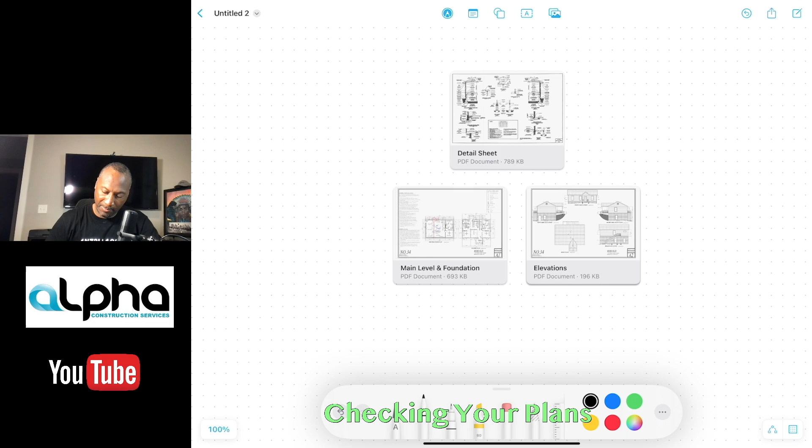So this is the set of plans right here, guys. You don't get no simpler than this. I tell you what, man, you can't ask for a better set of plans, guys. You can't get no better than this.

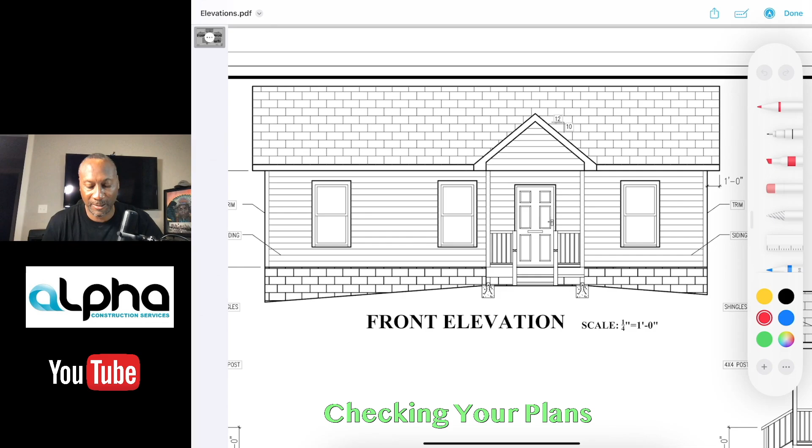So you can see, if I look right here, this is a gable roof. It's easy to calculate the lumber package on it. Guys, the house is just a box. You see the roof right here, it's just a box.

And you can look at this right here, man, and say, how can we mess this up? This is just too basic and too simple to mess up. Okay, so this is what we got.

So let me go to this. This is what I want you guys to focus on right here. So this right here is the details.

Now, unfortunately, in this set of plans, I think what the plan designer should have done was he got a bunch of details that he kind of put all together so that when he does different sets of plans, he doesn't have to keep changing them out. He just hits one type of detail. I think what he should have done was only put the details applicable to that particular house, to that one house. That's what should have been done.

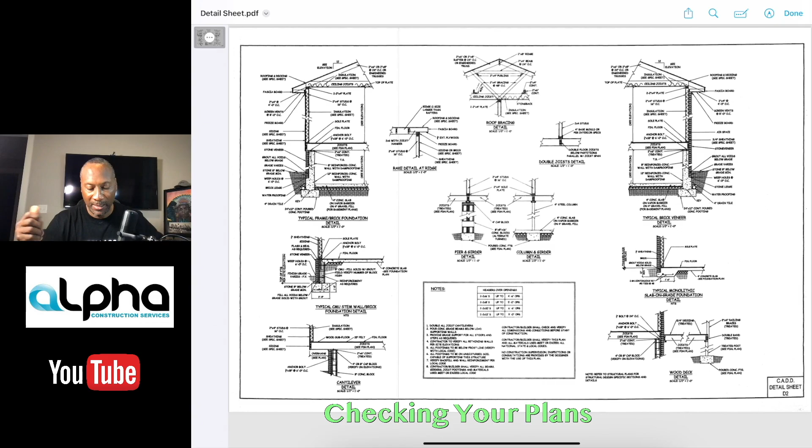But now we're going to look at the roof details. So this is what we want to look at right here, guys. Now, if you notice the whole purpose of this, let me see if I can show you, this beam right here that you see right here.

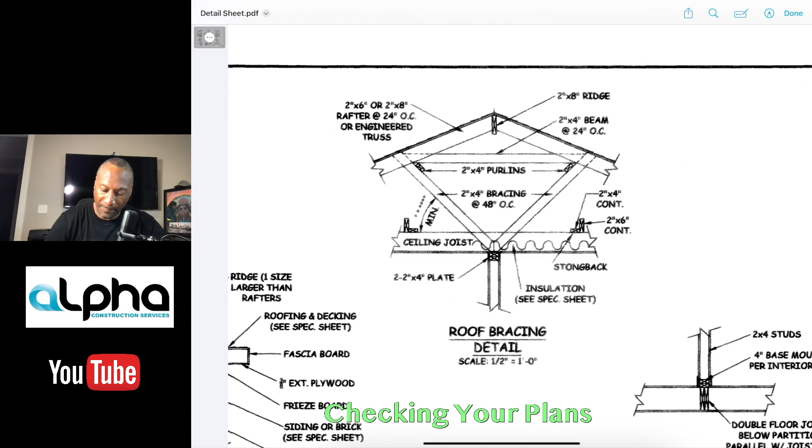Oh man, I knew that would happen. Let me just, all right, it's going to take a minute for me to get this right. Let me put this over here. So let's switch it over.

Let me just say, this beam right here is what you call a brace, guys. These are braces, okay? So this keeps these rafters - we got these rafters here, one here, one here. This keeps those rafters from doing what they call, it braces it right here to keep those rafters from dipping, because the gravity is pushing down.

So you have what they call, when this right here is called deflection, by the way, guys. When gravity pulls down on it, it keeps it from deflecting, because those rafters are kind of long. And so the longer they are, you have to break that span. This is what you call a span. So you got to break that span up with these guys right here, with these braces right here.

So these braces, these 2x4 braces, and really they should be called strong backs, guys. This right here should actually be called a strong back. This should be a strong back. And...

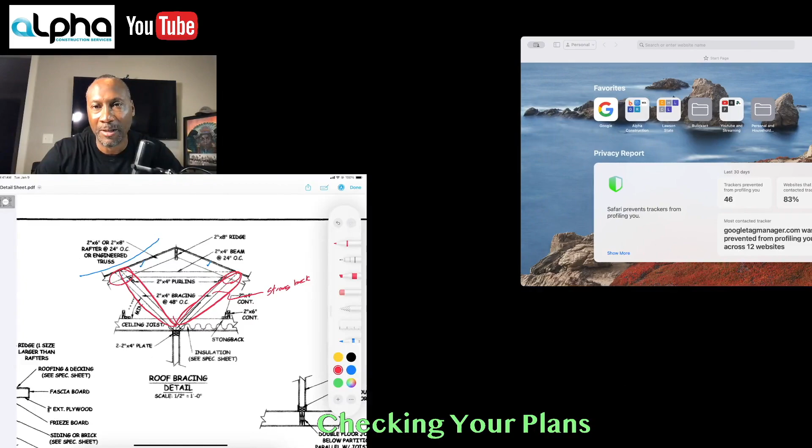I'll show you what a strong back is. Well, let me just see if I'm gonna try to bump from screen to screen. I'm just seeing how to do it right quick. Like, all right, there we go. We may be able to do this thing right here. So strong back.

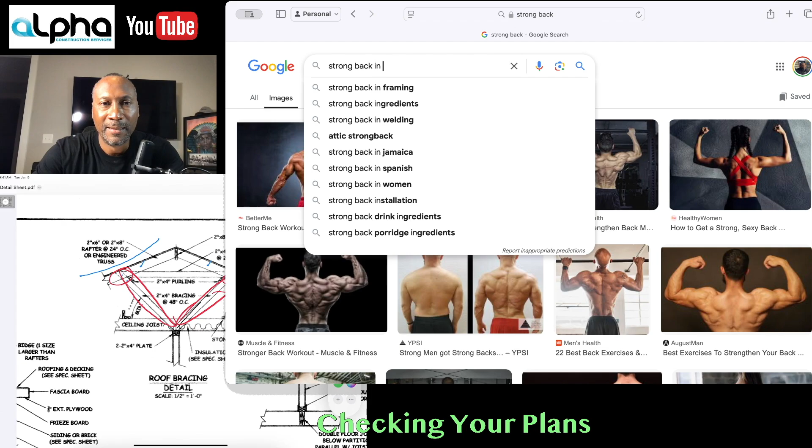Let's see if I can pull one up. Look at that. Pull up the... strong back. Let's see, in construction, let's see what happens now. There we go, right there. Let's see if I can find one so y'all can see what I'm talking about. This is an example of a strong back right here.

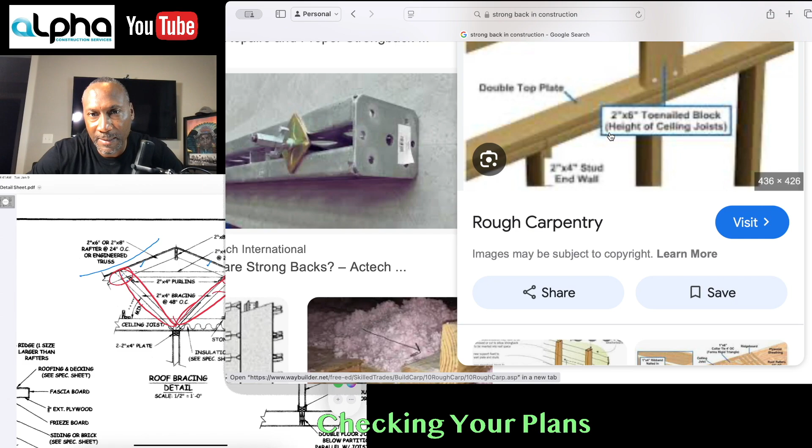If I can kind of show you this picture right here, guy, oh man. You know, right here, guys, if you see this picture, you got a 2x4 going this way, and you got that 2x4 nailed to another 2x4 going the other way, and it keeps that 2x4 from twisting and bending, right? So let's see if I can get that. All right, there we go.

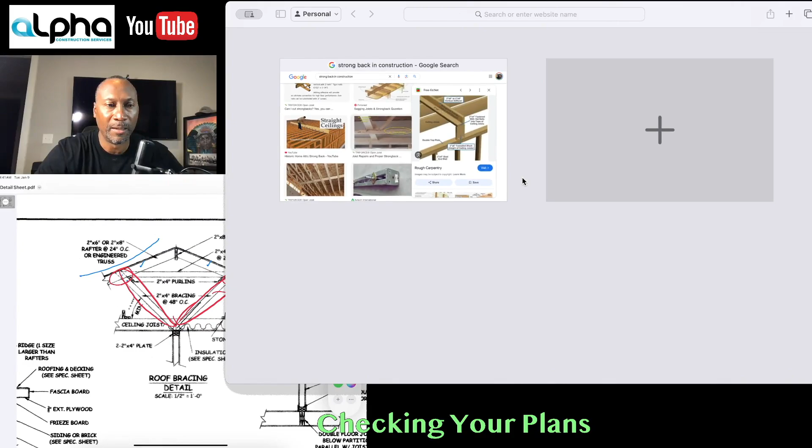All right, so let me go back to my other screen. So that's what should be put, guys. These right here things should be strong backs. They should be strong backs, and you should put some strong backs right here too, right there as well.

Does that make sense, guys? So I'm gonna erase all this right here because it can get kind of convoluted. So this is what we got, guys.

But now what I want you guys to really focus on is this roof load right here. It goes down, this roof load, and it has to be supported by this beam right here. That load right here, guys, goes all the way to the ground, or it hits the LVL beam or something, and it gets bent around and goes around all the way to the footings.

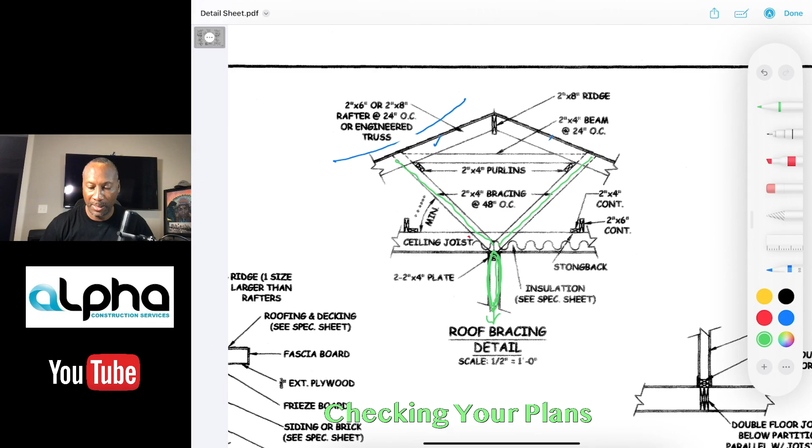So this is what I want y'all to keep your mind on right here. If I go back to this right here, guy, you can see it right here. This is what's supposed to happen, guys.

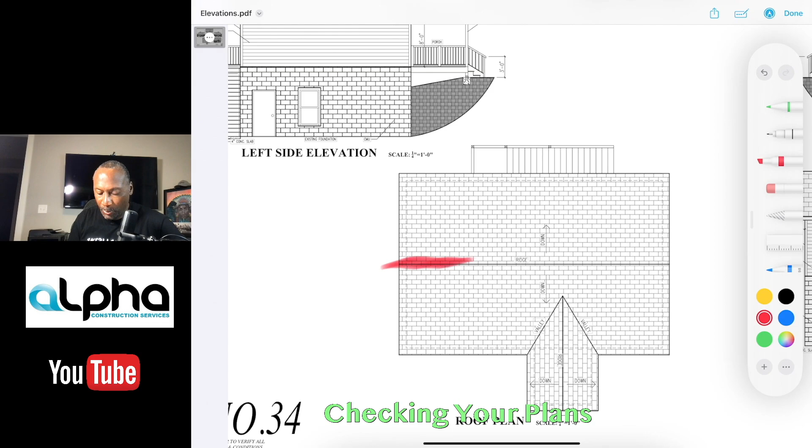So throughout this entire area of the house, you should have some kind of beam that goes... let's do this big. Let me erase this right here. So guys, throughout the entire area of this house here, you should have some kind of beam on the roof, in the ceiling, that goes all the way down here, so that, and this is what we were looking at.

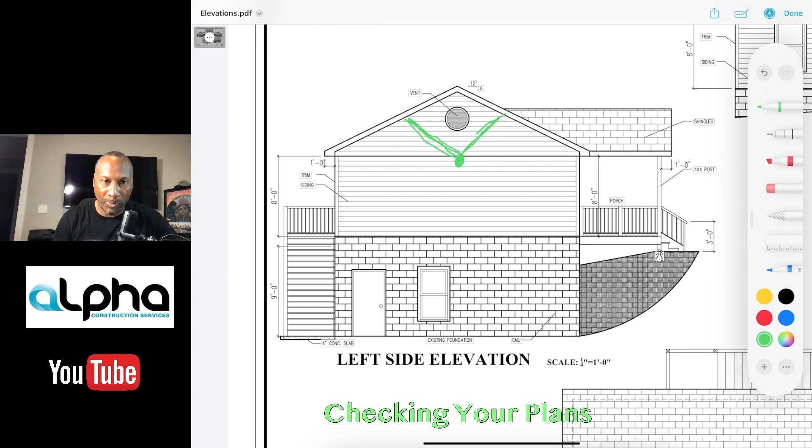So that my bracing that's holding up that roof, right, it's going down like this right here, y'all, the same little picture that we had right here. It's going to hit here, and either it's gonna hit a beam right here and go all the way around the house, or we have a floor or a wall in that house to take that load down. That's what was supposed to happen.

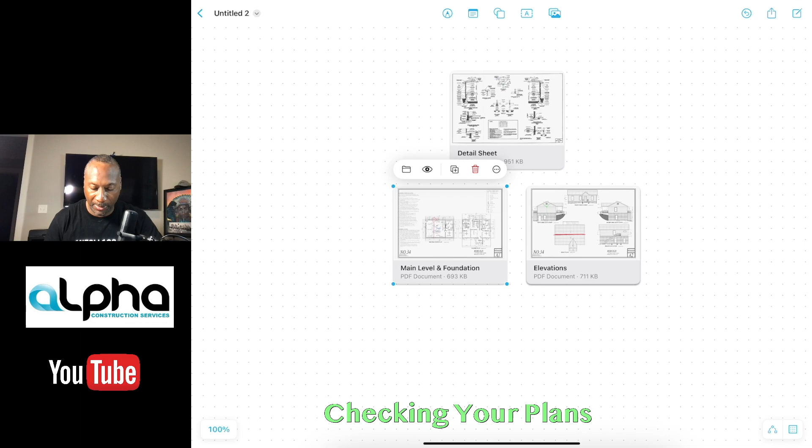Now, in this case here, guys, let's go to the plan. So in this case here, y'all can see I've already been working on this right here. If you can think of it the way I just showed it, guys, in this case here, let me erase this right here. So in this ceiling, so this is the plan of the house. So you see that we don't have any kind of wall going straight down the middle.

Well, we got that one little wall right here, that's okay, but we don't have a wall... so we don't have a wall that goes down the middle right here. Now we do have one, right here, that we can brace that bad boy off.

Which may work, but we got to look at the foundation, the basement plan too. So we're gonna get into that. We don't have anything right here to brace off of. You see, there's no wall there.

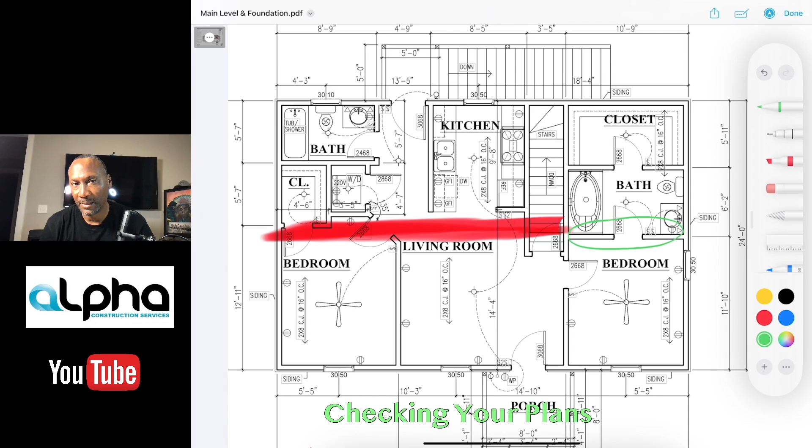Because the way this guy did the foundation, he took the joist in a different direction. So if you look at the joist, they're right here, going in this direction. This is the flooring joist right here. The load that he has, guys, let's see if I can get this thing right here right, are right here.

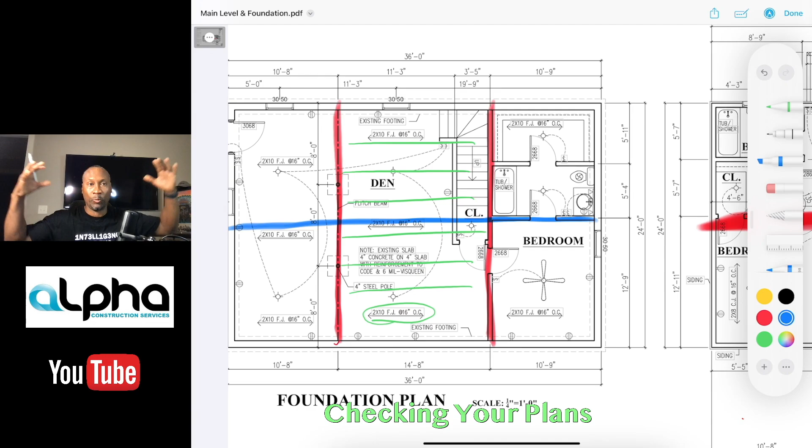When they should be here. That's what he should have. Does that make sense? So that's a problem, guys. We're not distributing that load, so the roof system doesn't have anything right here to carry the load all the way to the foundation.

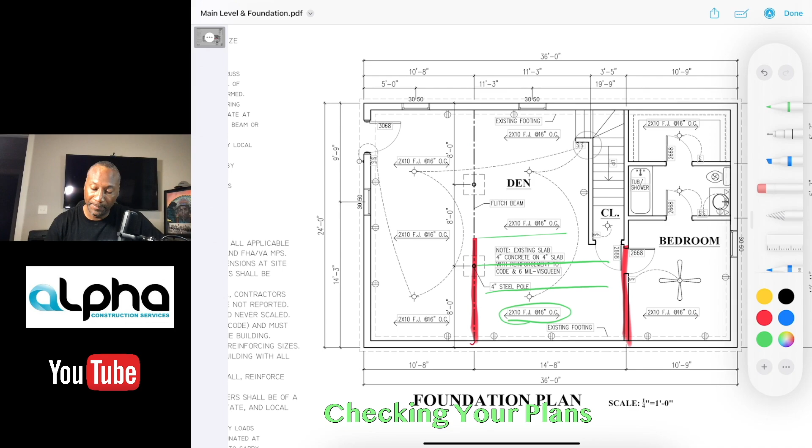Now, fortunately, guys, this is not a really big house, so my engineers are on it. It can be fixed. But let me show you how we can fix this right here. And I'm not an engineer, so don't try this at home. Now, here's what you can do, and this is what we're gonna do.

We're gonna run a girder, which is gonna be a couple of LVL beams, and we're gonna have to run them. Let me get the right one, let me get the right color. So we're gonna run an LVL beam in mid-span of this house right here, and it's probably gonna go just like this, okay?

Then now we do have a load right here, because that's another thing - he don't have the grade beam right here, guys. We don't even see it, I see a flitch beam, I see the footings, but he don't have the grade beam right here. So what we're gonna do is we're gonna do that, and then we're gonna come here, because we don't have any grade beams to take the load all the way down to the ground.

Right here, we don't have it. He didn't have any grade beams in the concrete to take that load all the way to the ground, so we got to span over that too. We're gonna go from there to there, do this one in red, then come again and make another LVL beam to go from there to there.

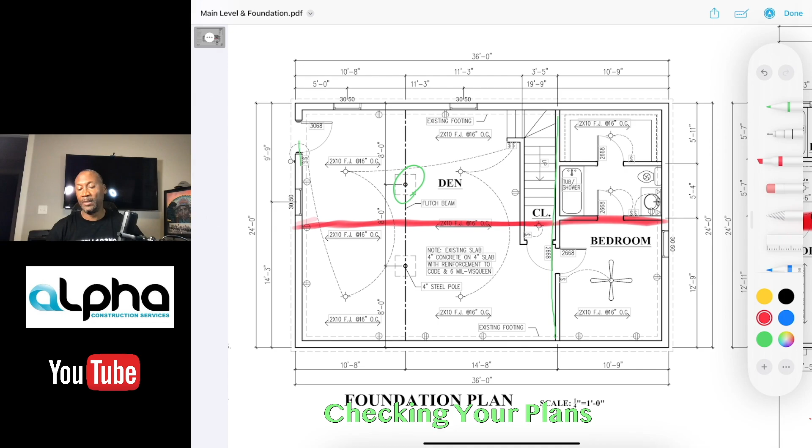That's holding up this floor. Let me erase this right here. So what that's doing is holding up this floor, and then we can span all the way across. Well, actually, you don't have to do that. I'm sorry, we don't have to do that.

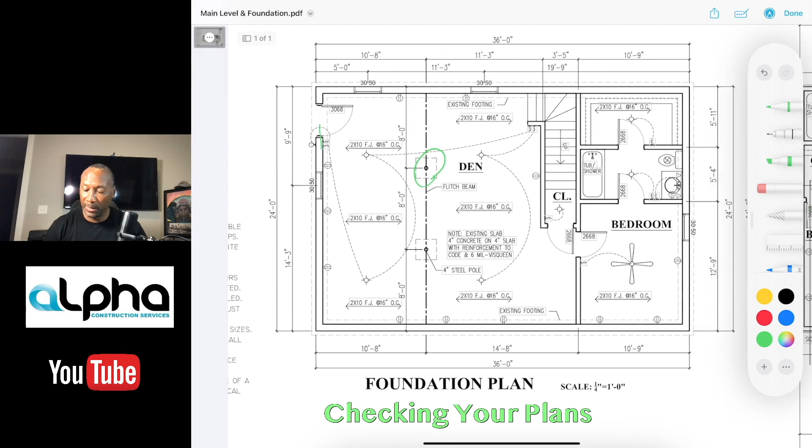We would have to do this on the ceiling level. So let's get rid of this right here. This right here is not it, let me take this out. So that's not what we're gonna do. What we're gonna do is go to the ceiling level. This is the ceiling level, not the floors.

And we're gonna span with an LVL beam all the way from here to here, and then go from here to here. This is your ceiling part. And then we're gonna run our ceiling joist this way, and they can connect to those LVL beams.

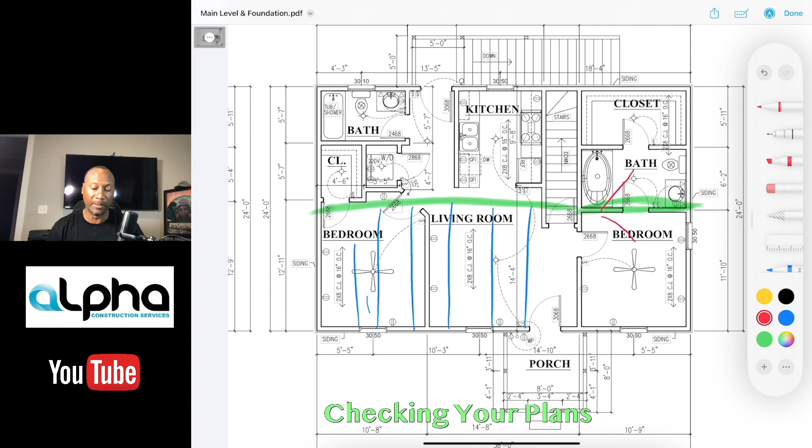So what's actually happening, guys, is that load -- we're gonna brace off of this right here. So we got our braces, gonna brace off of this, that's holding up the roof. But the span is gonna go all the way, hit this beam right here, and go all the way around. It's gonna go over here. We got one that's gonna hit right here.

I'm bad at this, right. One's gonna hit right here, and one's gonna hit right here. And then this right here is gonna span all the way, and it's gonna hit right here. So we're distributing that load all the way around, but we have a beam that we can span off of. So that works.

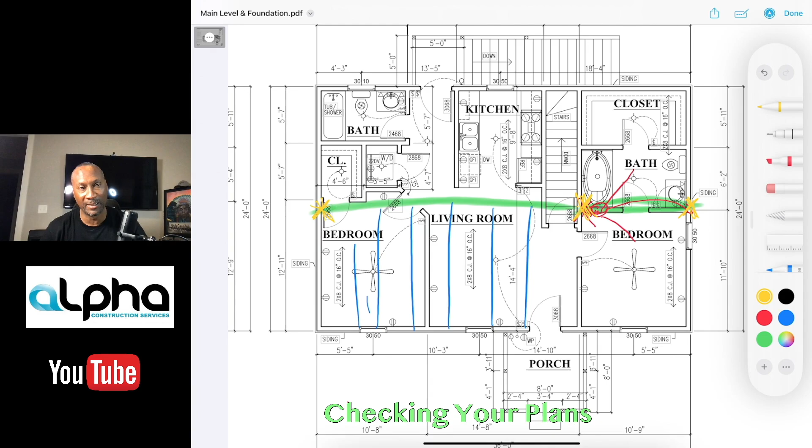That actually works. And then that way, what we do on the inside, those are just wall partitions, so it's not hurting us. But that's how our ceiling joist is gonna have to run. So now we can still do what we got right here, leave this alone. We can still run these guys the way we got them, because we're gonna go all the way around that at the ceiling joist.

We need something to brace off of. We need a roof plan to brace off of, and this is our problem right here, guys. It's our problem. And there's probably more ways to fix this other than the way I did it just then.

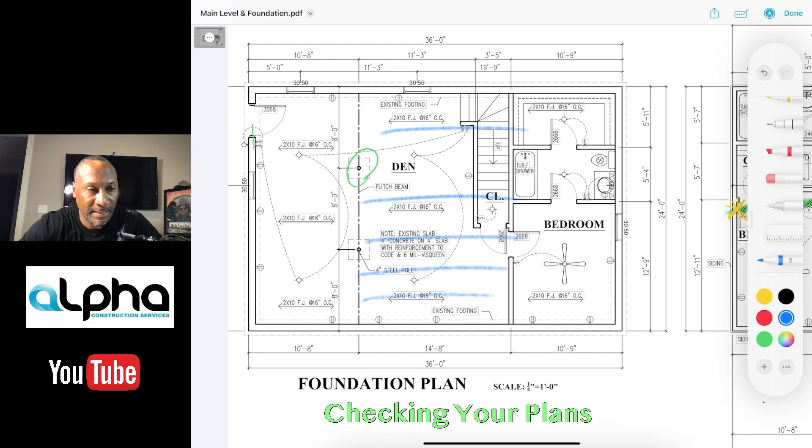Got the wrong screen here. There are probably more ways to fix that other than what I just showed you. But guys, what I want you to get out of this is that you gotta have good people on your team helping you find and catch these things, or you'd be involved in a lawsuit, man. As a builder, you just ain't got time. You need to be using all your focus and energy trying to grow your business and understand the construction process.

So guys, let me know your thoughts. And like I said, there's more than one way to fix this right here, man. This is just one particular way I knew, and I was talking to my students last night when we had class, and we ran over this whole thing together, man. I understand, my guy kept telling me I got a problem with it, and he was trying to figure it out, because I got to get that lumber package, man. We got the foundation ready on this right here job site.

Everything's ready to rock and roll, and now I gotta wait. You know, that's another thing -- my customer is paying, they're paying interest on this thing as it goes, they got to pay interest every month. So it's my job to try to get this thing going, I got to get it moving, I gotta make sure it keeps going. So this is where we're at. Now we did have a situation, so let's go back to that bottom floor.

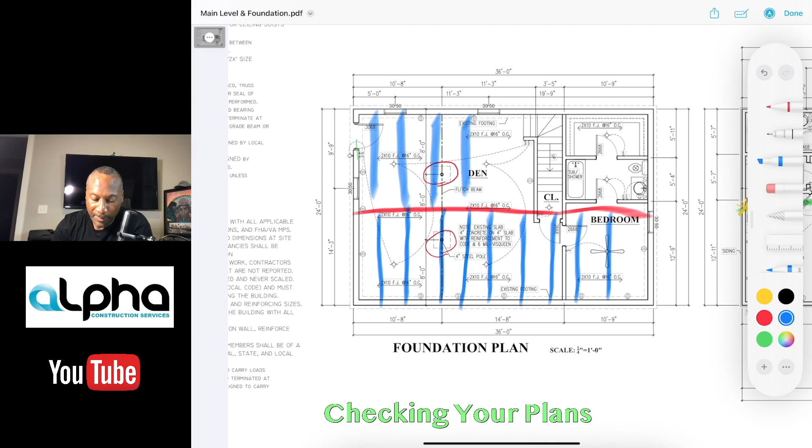Just kind of an idea of how the flooring joists need to be run. I can run them like that. And actually, in my opinion guys, this would actually be better, because now the span—look at the span he's got right now from here to here, that is a 15-foot span.

But if I'm going from right here in the middle, if I'm going from here to here, these two right here, when you cut it up you're taking off a foot of that span, so you've got less span, which is probably better, guys, because you want to span the shortest amount of distance—that cuts down on deflection.

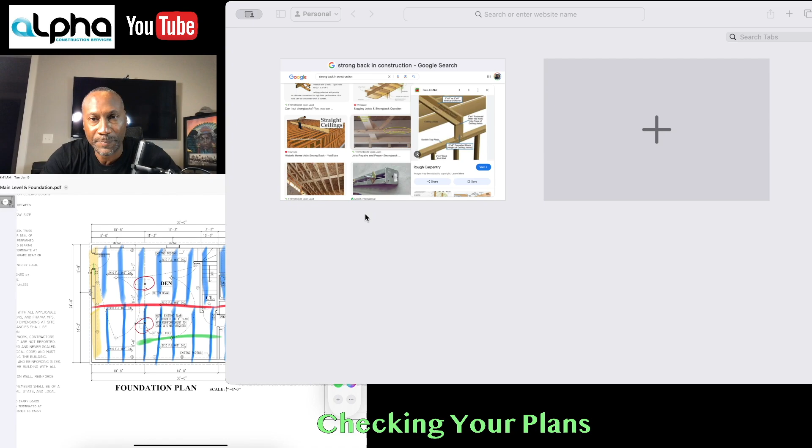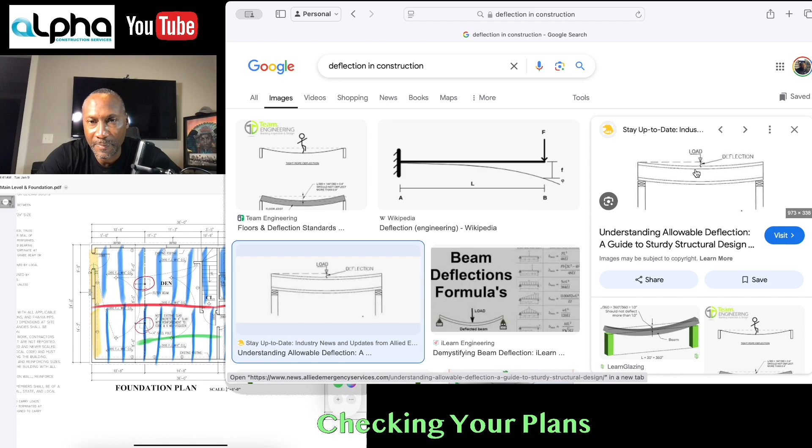And I want to show you guys what deflection looks like. Let me see if I can find my other screen here. Deflection in construction—there we go. You can kind of see this right here. This right here is the one I want to show you. Let me see if I can make that bigger. This right here is probably better. Yeah, there we go. So this right here is what we mean when we say deflection, guys.

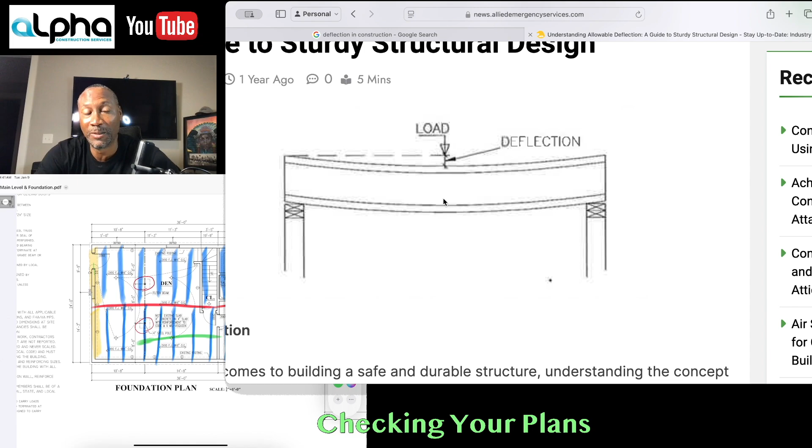This is what we mean. After a period, if you put furniture or something on that house, just a lot of weight—and you don't even have to have a lot of weight, you can have live loads or dead loads, especially if you've got kitchen islands or a tub or something like that—over time, if you don't have the right size lumber and you span too far, that beam is going to start giving. It's going to start pushing down, and you can feel it in the floors. You can see it, especially if you've got hardwood floors, the shiny kind. You can see it really, really well.

So that's what you've got, guys. All right, guys, keep that in mind.